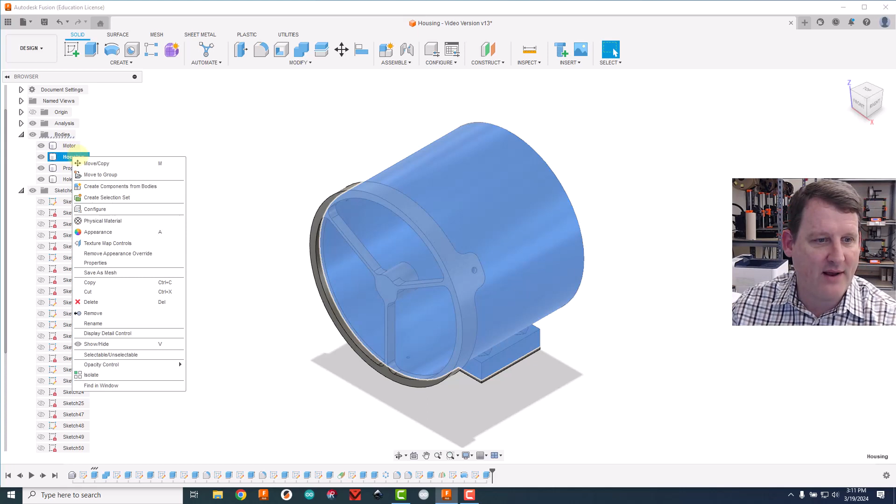I'm going to turn my motor off, go to the housing, right click on it, and do Save as Mesh. Yours won't be clicked here, so if it is, unclick it. STL millimeter is fine, refinement high, and then click OK and choose where to save it.

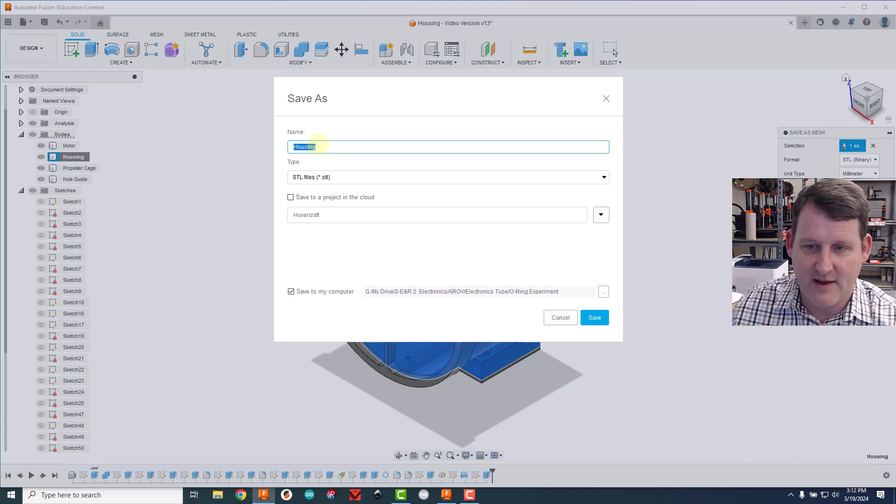You may want to save this to your E&R 8B or 5D or 4A or whatever your thumb drive is. Save it to your thumb drive. I'm going to save mine to my hovercraft folder.

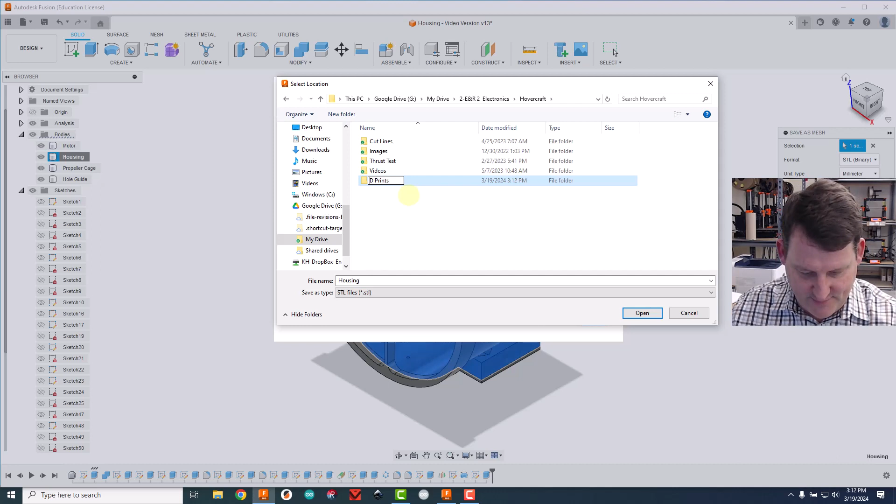Make a new one for 3D prints. And inside 3D prints, I'm going to call this the housing.

Create, save, and save one more time. I'm going to repeat that for the propeller cage: create, save as mesh. Propeller cage, hovercraft, everything looks great. Save. And then hole guide, save as mesh.

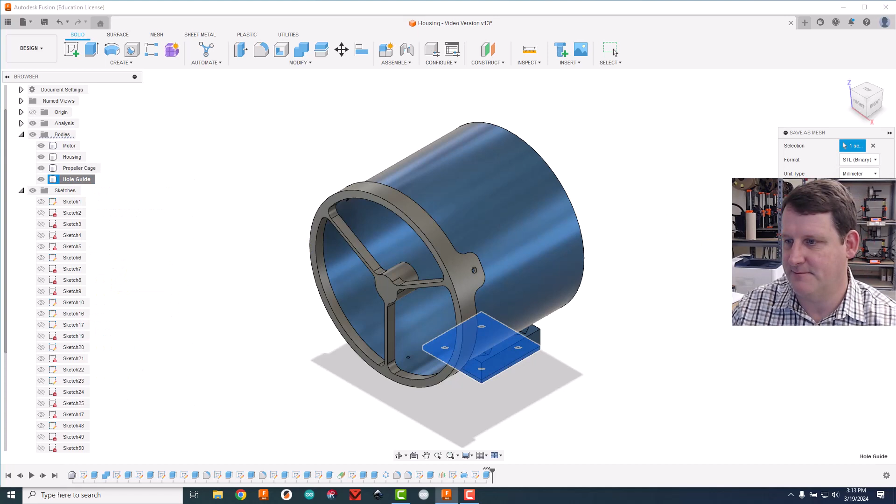And in 3D prints, that looks good. Save. All right, now I've gotten that all done. I'm going to do a final save in Fusion 360. Click OK.

And close that out. Open up Prusa Slicer on your computer, and we'll just slice it up and get it ready to go.

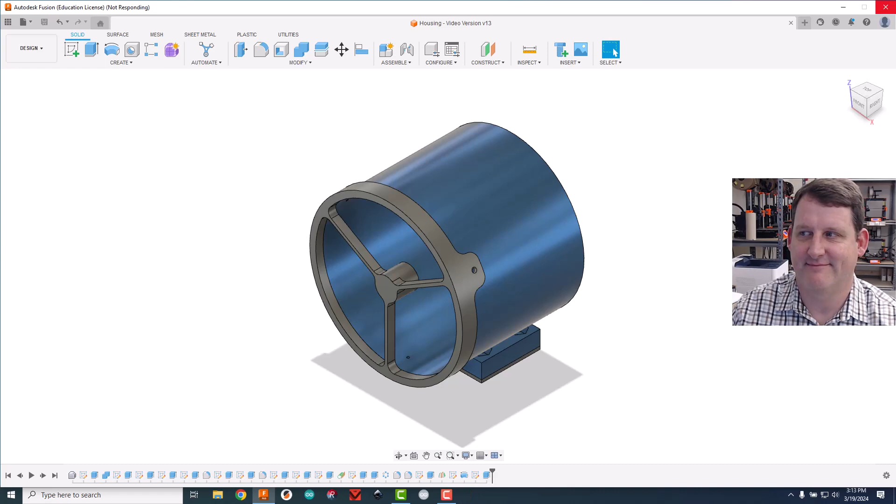Being a little slow opening up Prusa Slicer. All right, there we go.

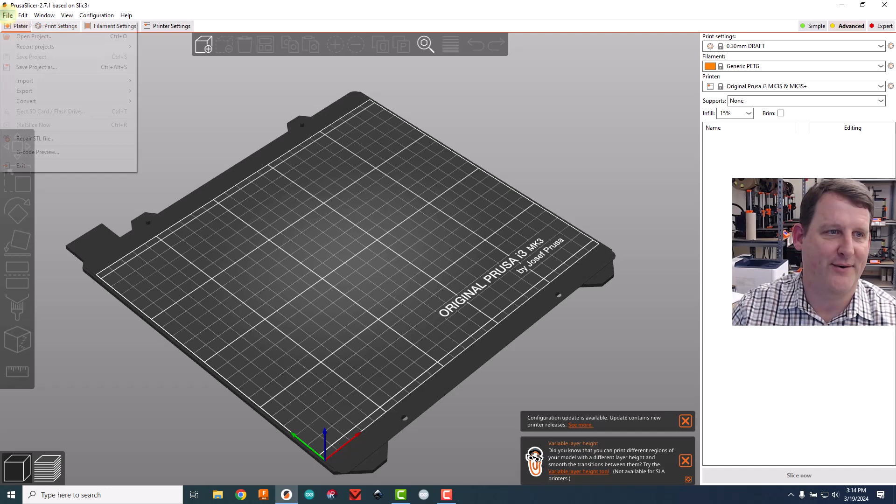File, import, STL, and then simply find where you left that file. For me, it was electronics, hovercraft, 3D prints, and I'm going to insert. Can do all at once.

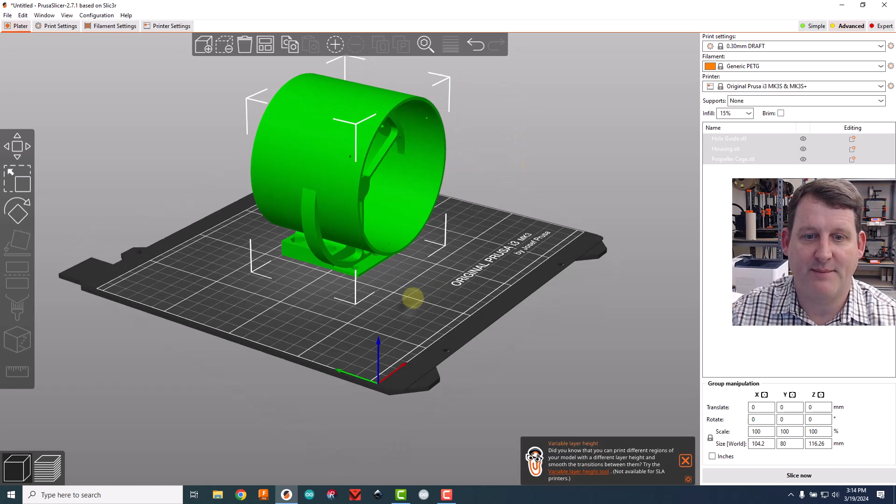Awesome. And now I need to place them down. So notice if I were to try and print the housing this way, it would need supports all over the place. But because I made this whole backside flat to itself, I can just grab place on face, and then click on this backside. Now very little needs support.

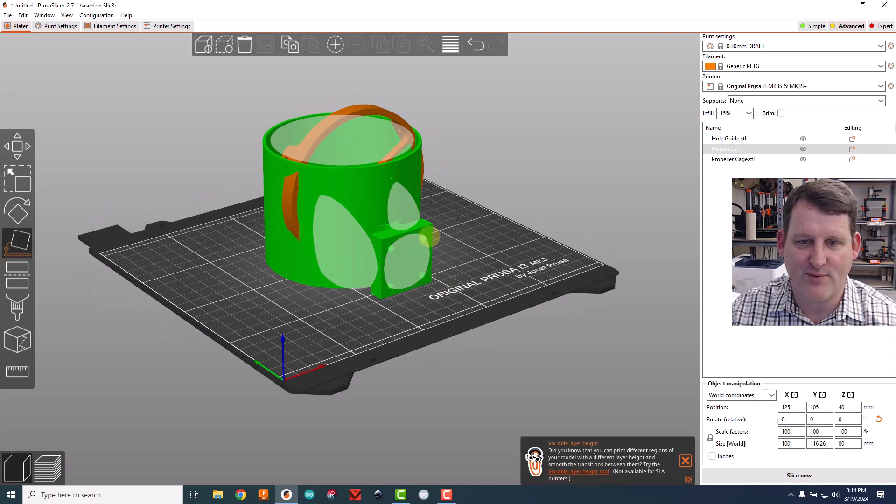So these holes won't print perfectly, but I can live with that. I think that's good for that one. I'm going to click onto the next one, which is the cage. I might move it around and then place on the face of this flat side.

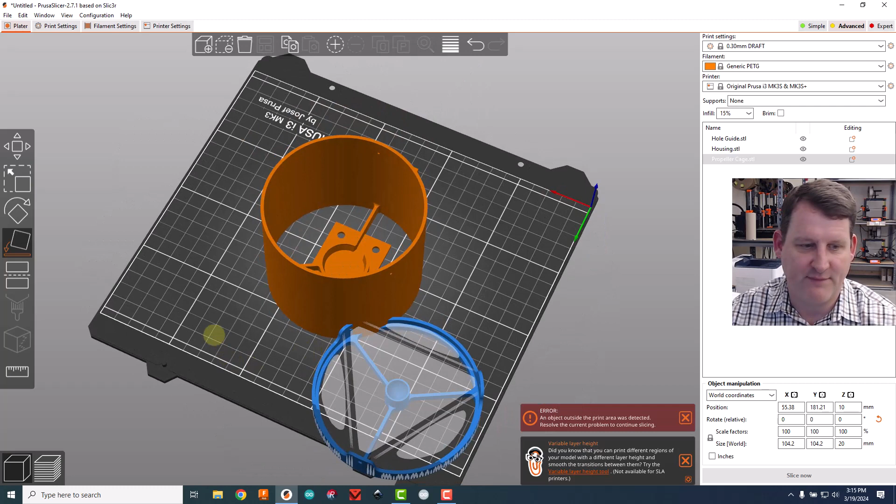The blue means it's not on the print bed, so I'll keep flipping it over. Click off of that and then just move it onto the print bed real quick. And that one looks fine just the way it is.

Let's go ahead and arrange them. So I hit the auto arrange button and it moves them around into a good position, which is just like that. Yeah, that looks great.

So now we're ready to slice. Make sure that your settings are set to 0.3 draft. We don't need any finer detail than that. And that you're on generic PETG, and the original Prusa i3 MK3S Plus is the printer we're using, and then hit slice now.

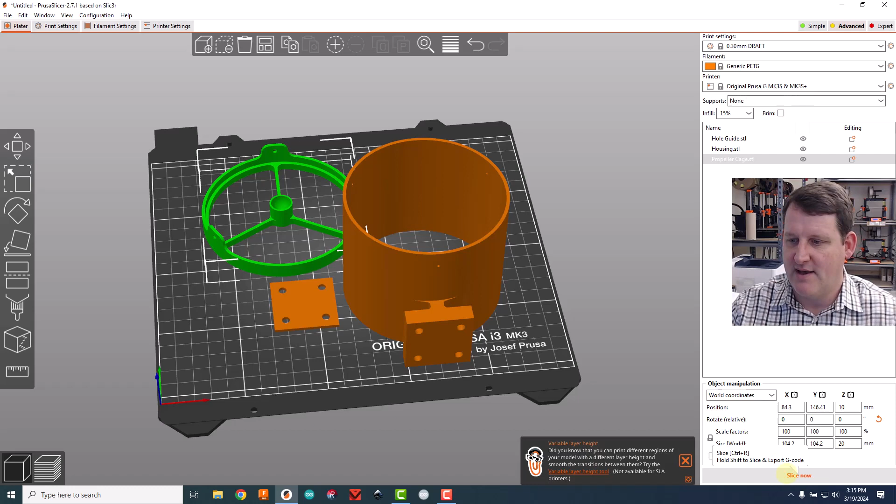While this is slicing, you can go grab one of the SD cards from the printer that you want to use.

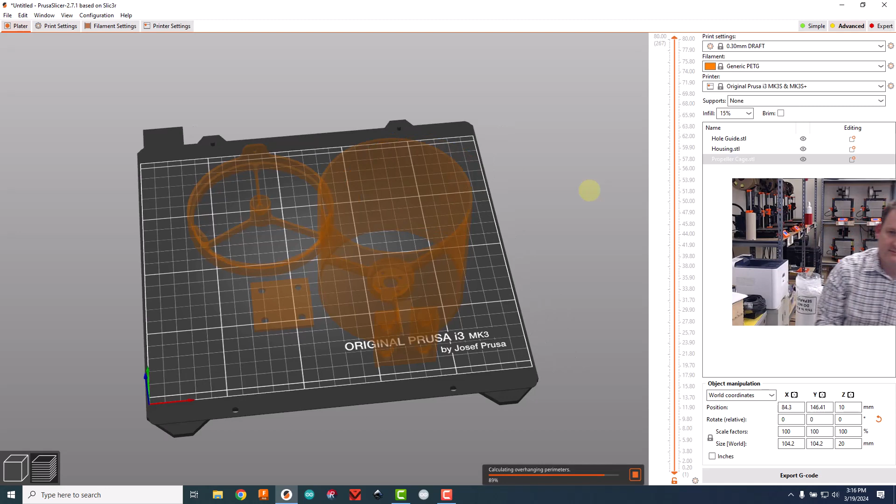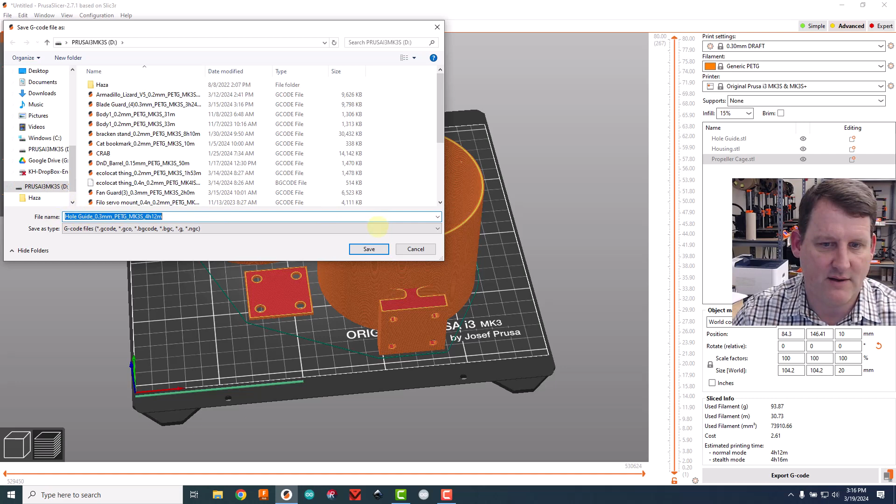You're looking to save on the file called Prusa, that's the little thumb drive. And I'm going to call this... actually, housing parts is what I'm going to call mine, so I can find it later if I need to. And then hit save.

Once this pops up here, you can go ahead and eject the drive. It's now set to take the drive out of the computer, take it over, and get it printing. You can tell that this is going to cost $2.61. It's going to take 4 hours and 12 minutes to print, and it's going to use 93 grams of filament.

So lots of important information there. That is it. You need 2 sets of these. If you want to print them on separate days on the same color, that's fantastic. If you want to grab 2 printers, load it to another card, and print them both in the same day, that is also fantastic. Good job on everything. Keep it up.